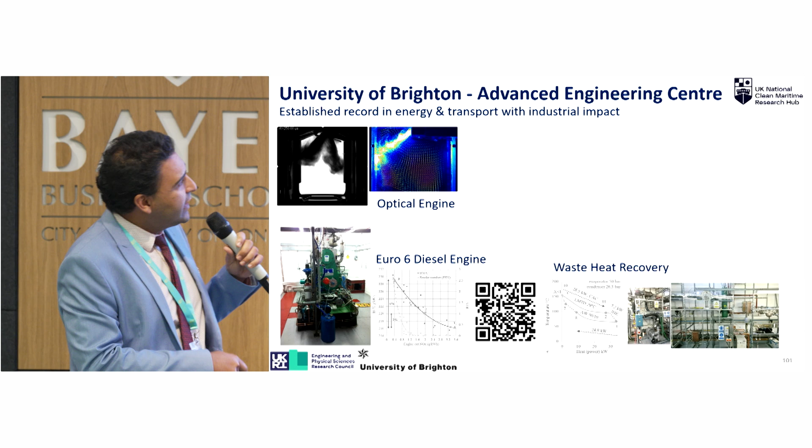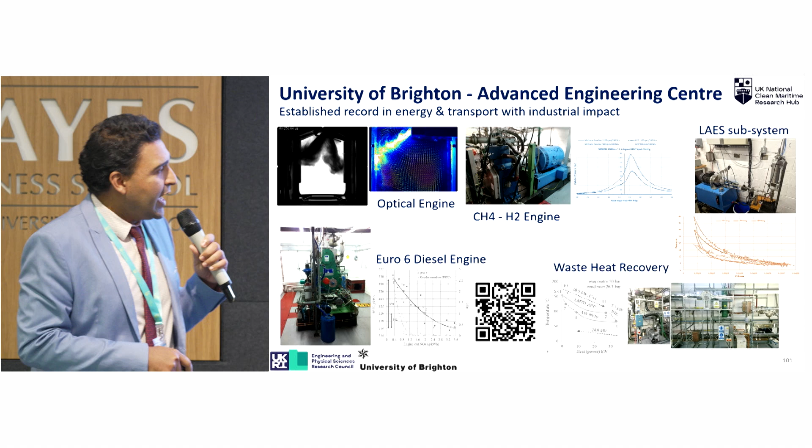If we recap 10, 15 years, what are the type of things we have actually been up to? This is looking at the fundamentals inside an engine - the optical engine, looking at diesel engine works, large-scale waste heat recovery, hydrogen, methane engines, dual fuels, single fuels, and even liquid air energy storage systems. All of this has been happening at University of Brighton for the past 15 odd years, everything backed by experimental results.

I found a phrase which is quite interesting - somebody said to me that liquid hydrogen is the champagne of energy. It's for those special occasions. It is that energy intensive to actually make it right now. There are also activities happening on getting ammonia ships on the seas by 2026.

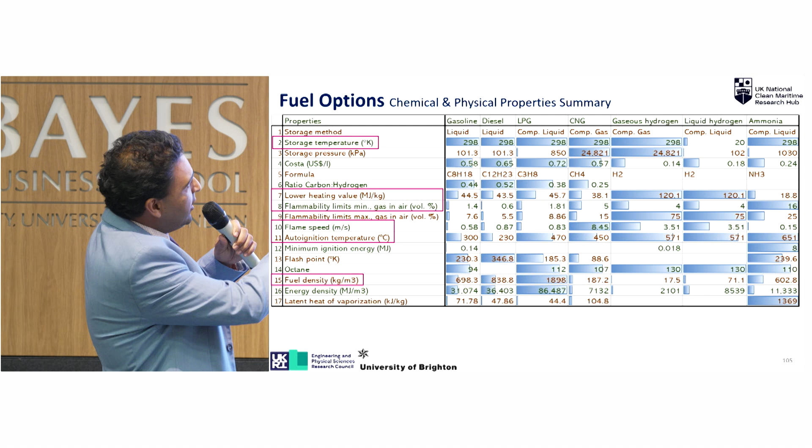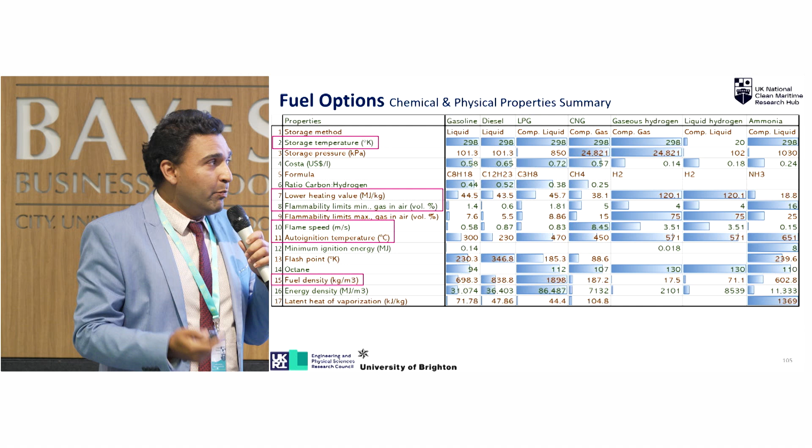There's a big debate - there's a lot of fuel options there, different criteria, different fuel metrics. This is a non-exhaustive list. Things being considered include the range of storage temperatures, how much energy you can get out of the fuel, how well the fuel burns in conventional setups, and how it's going to impact your overall shipping needs, how much cargo space reduction you're going to tolerate.

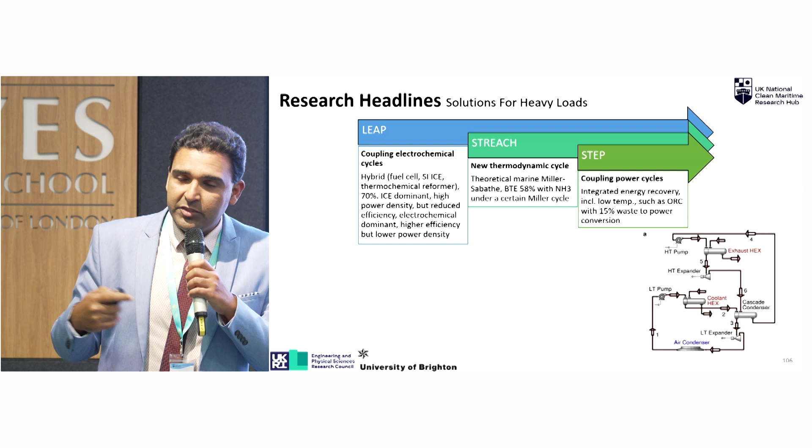If you take a deep dive into the academic literature out there, you can pretty much break everything into step, stretch, and leap approach. Step is the lower hanging fruit - heat recovery systems, new heat recovery systems coming up, tapping into some of the waste heat recovery. Stretch end is looking at new engine cycles. And leap end is pretty much all the bells and whistles - here you have a reformer, a fuel cell, an engine, everything working across different parameters.

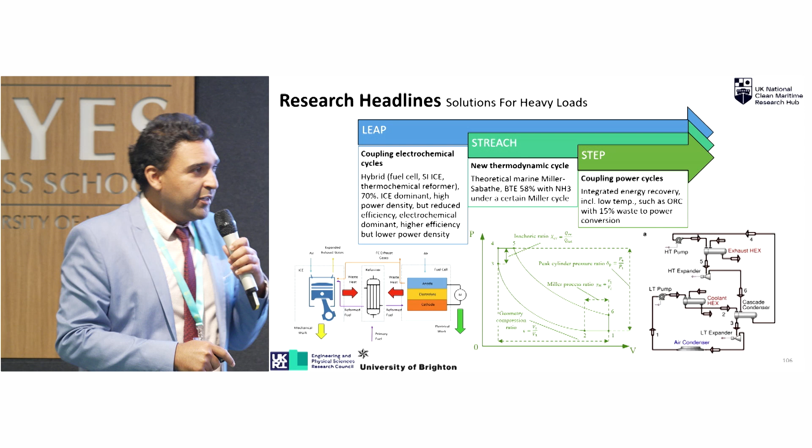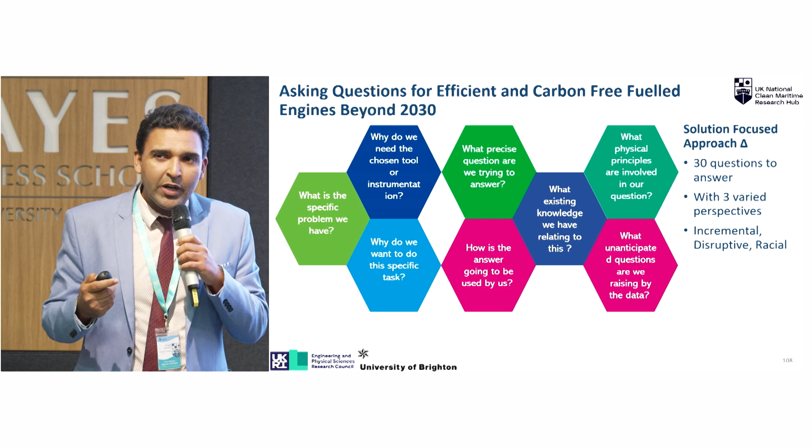So what is the methodology we use to ask ourselves how do we consider disruptive technologies? Some questions like, why do we really want to do this specific task, and what physical principles are involved? These sort of questions may seem quite mundane, but we're trying to question ourselves - are we actually unknowingly coming up with a constrained solution or not?

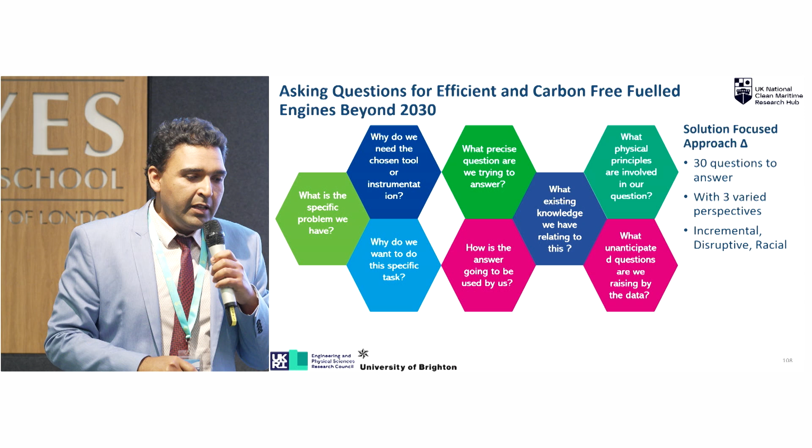So we have 30 sets of questions we look at from 3 different perspectives. From a business point of view, consider this as market and technology - you want to do incremental innovation, disruptive, and radical. Incremental - you've got to ask the right question if you want the right answer.

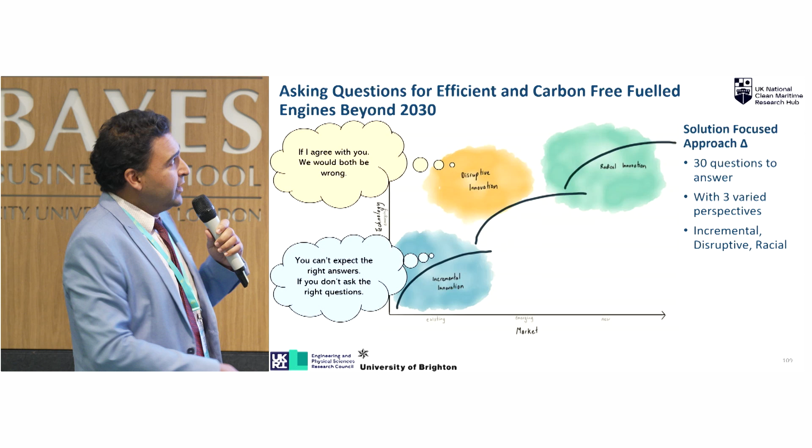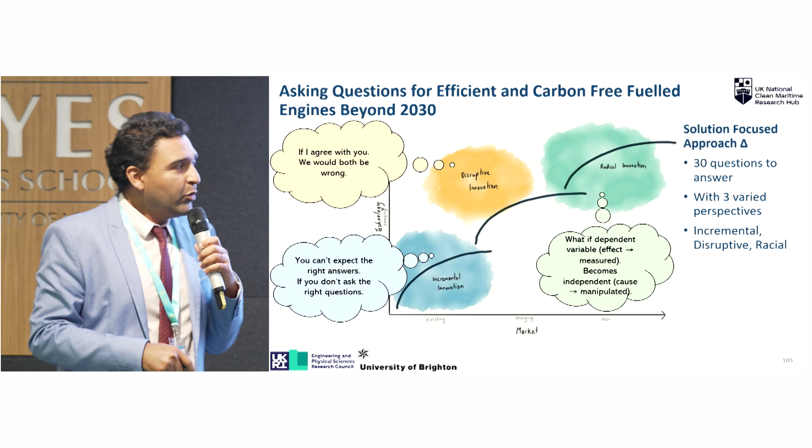Disruptive innovation - what if I think exactly the way you think, and what if we both are actually wrong? But the fun bit actually happens in radical innovations, when you say what if a constrained variable that I have, a dependent variable that I have in my system, suddenly becomes independent? That really opens new possibilities as far as new engine technologies are concerned.

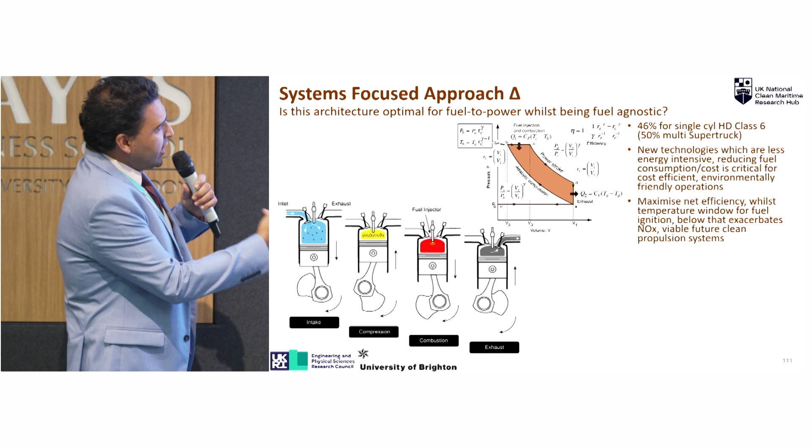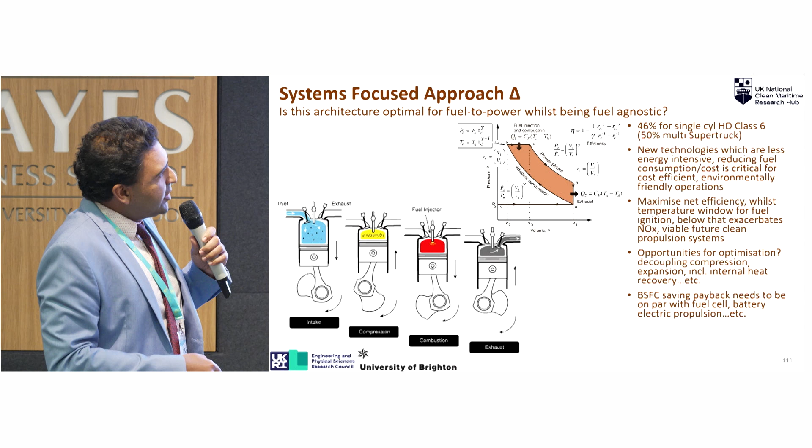We applied that methodology to a systems approach and started looking at the overall engine architecture. In a conventional four-stroke engine you're compressing, doing your combustion, then your exhaust. You want to keep it cool, heat it up, combust it, and everything is happening in that one cylinder. So we questioned ourselves: what opportunities can we gain if we were to separate these processes out and optimize each and every process?

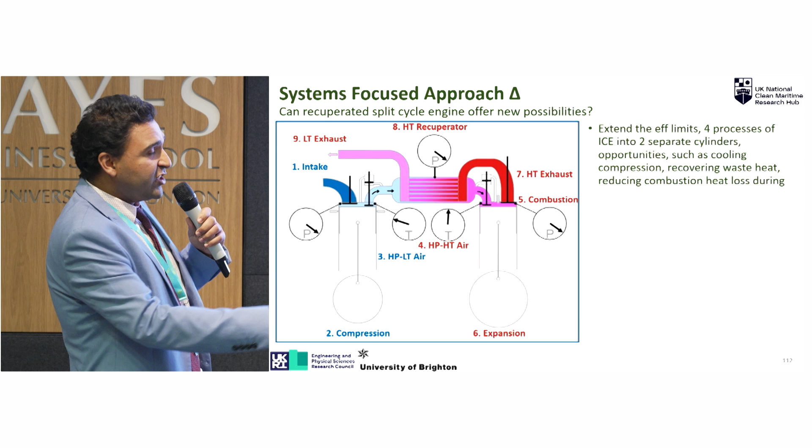Thinking about radical engine technologies, but nonetheless ones that utilize very similar engine architectures to what we have right now, this setup in front of us is called a split cycle engine. It separates the compression, expansion, and power generation into two separate parts, so you have more variables you can tune and optimize.

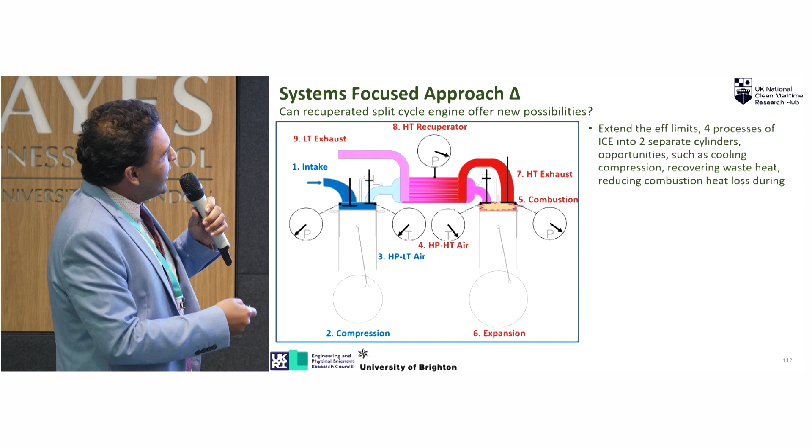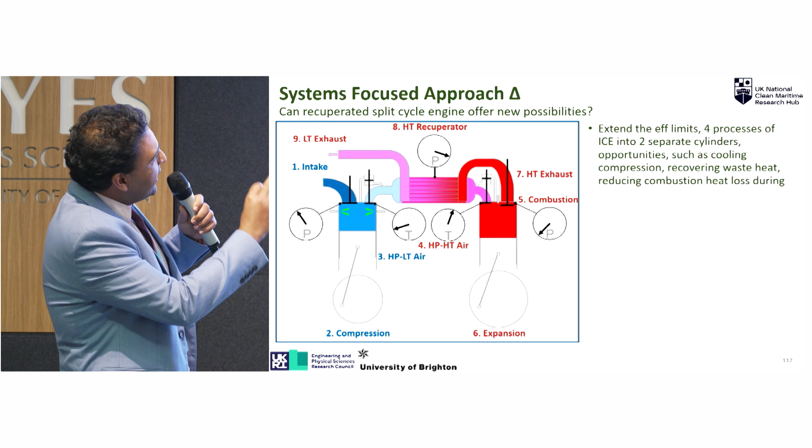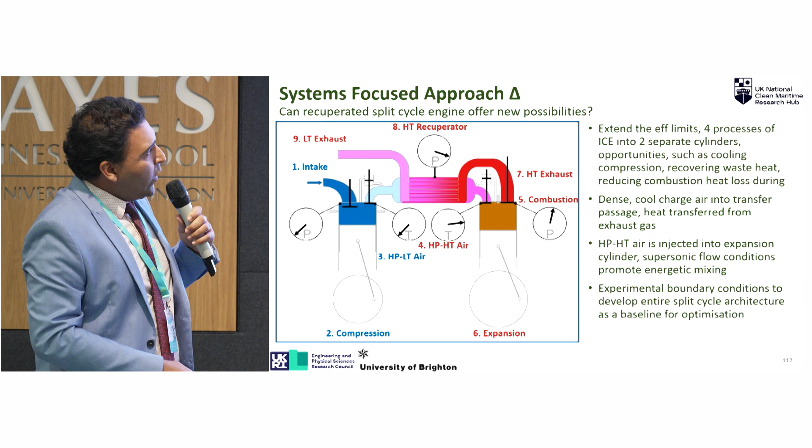We undertook lots of experimental activities trying to optimize these subsystems and connect them all up in an overall systems approach.

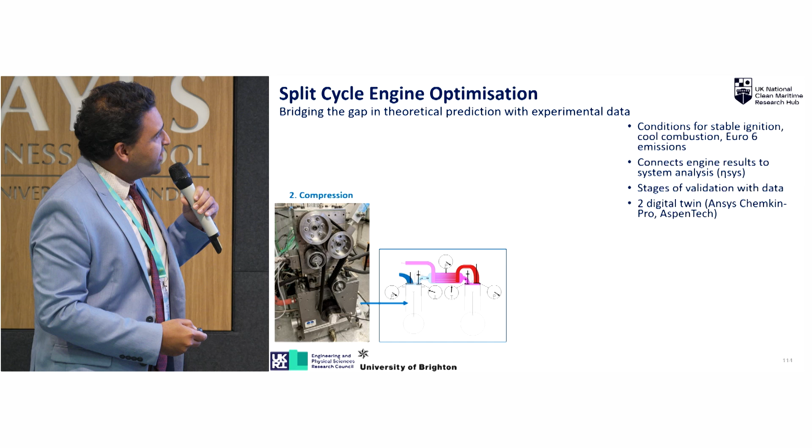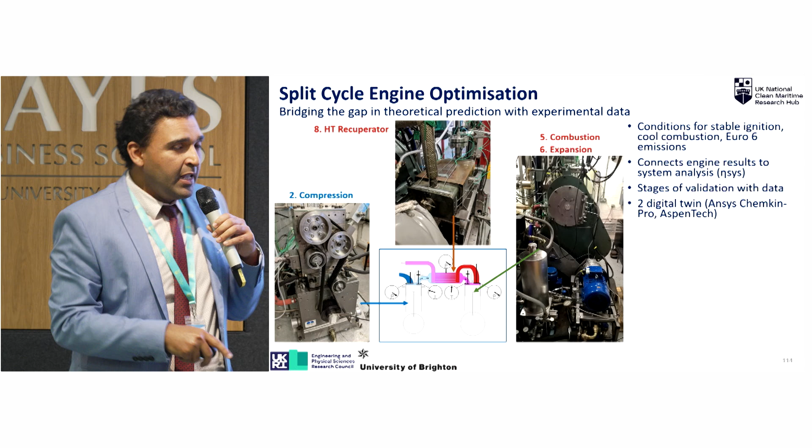At the compressor end, this is what our compressor test bed looked like. This is our compressor setup, where all the experimental activities happened. That's our expander rig, which is our power generation, and we have our internal heat recuperation. So any exhaust heat coming out of the system is actually being recovered within the system in the process.

We mapped all of these things up and created digital twins of them to do all the exploratory studies that we wanted.

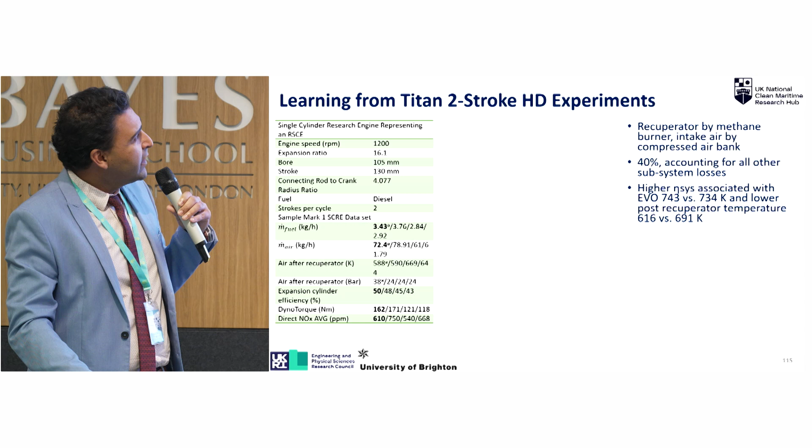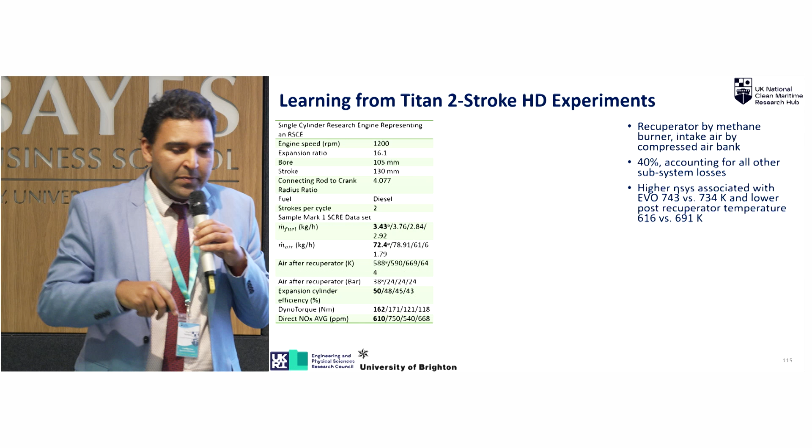This is just a parametric input-output that came out of some of our tests. The key number in bold here is we're starting with an expander efficiency of our system at 50%, but when we start including all the losses into account, this brings it back down, and we're around the 40% threshold.

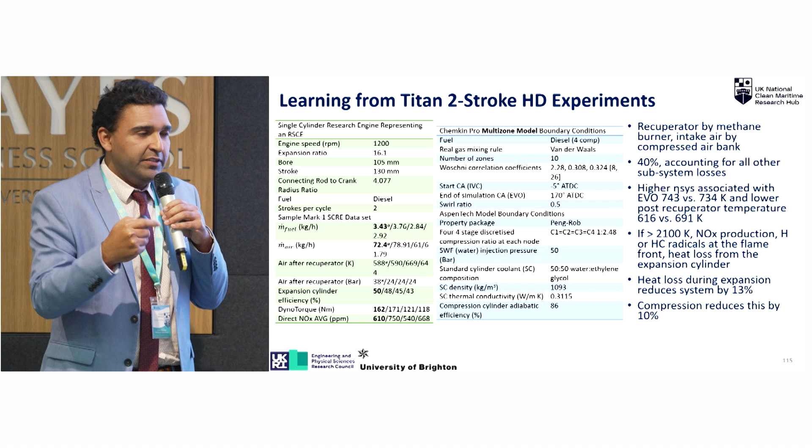Keep in mind this is a single-cylinder engine. Its efficiency is going to be slightly lower than in a multi-cylinder case. So what we really wanted to do with this overall project was push that 40% as high as we can.

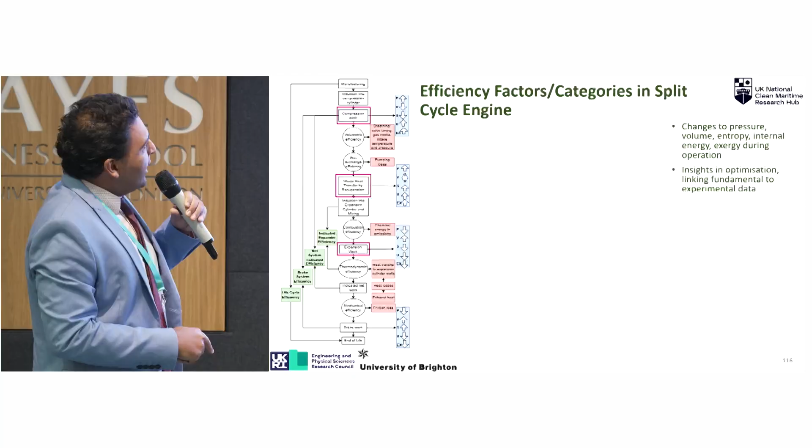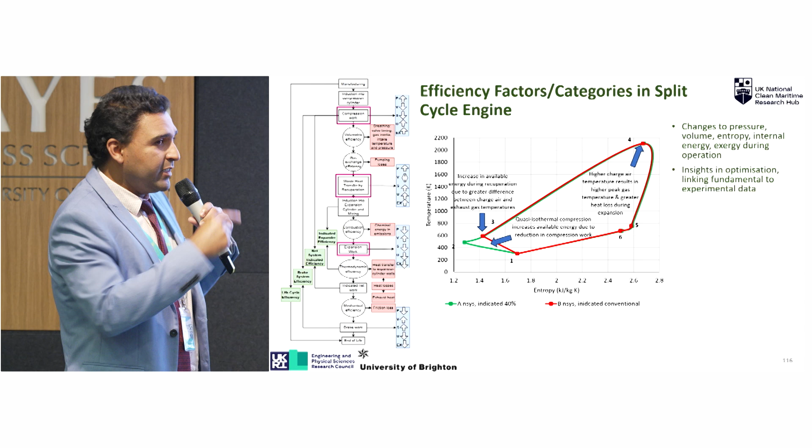I'm teasing you a little bit with what the end result should look like, but the area under the graph is linked to efficiency. The greater area we can get, the more effective fuel-to-power conversion we can have.

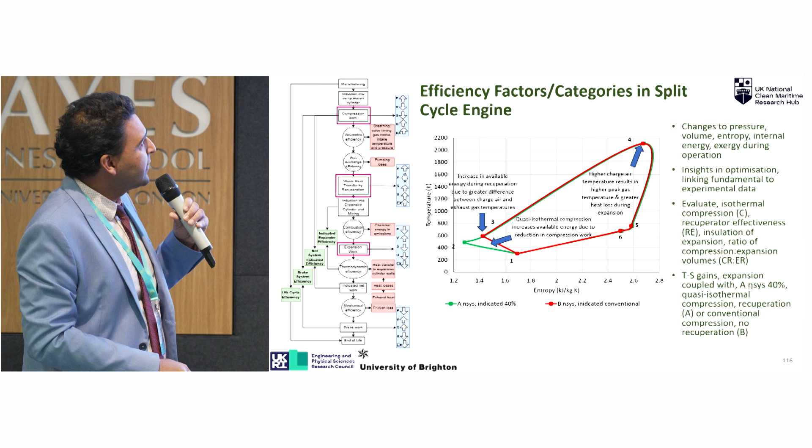We want to do all of this while being fuel agnostic as far as the engine is concerned. So compression, waste heat recuperation, and expansion work is what we're going to be focusing on.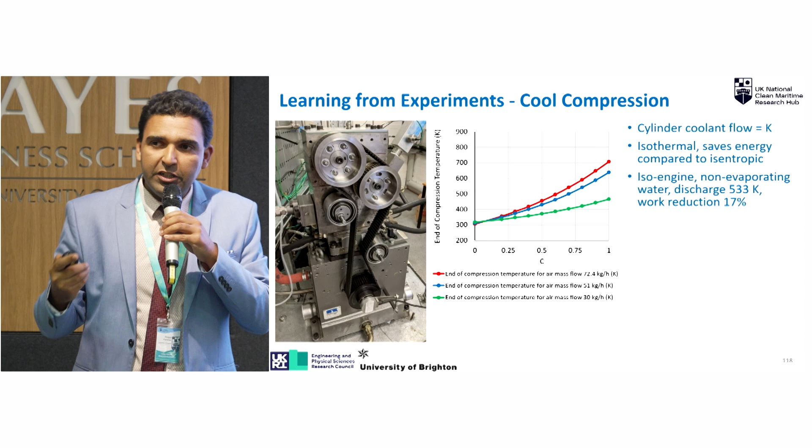Let's look at some of the compression results. These are analytical results, so we have a good appreciation of how much compression we actually need to opt for at our compressor end of the cylinder. We want to opt for isothermal compression - you can get more work savings out in the process.

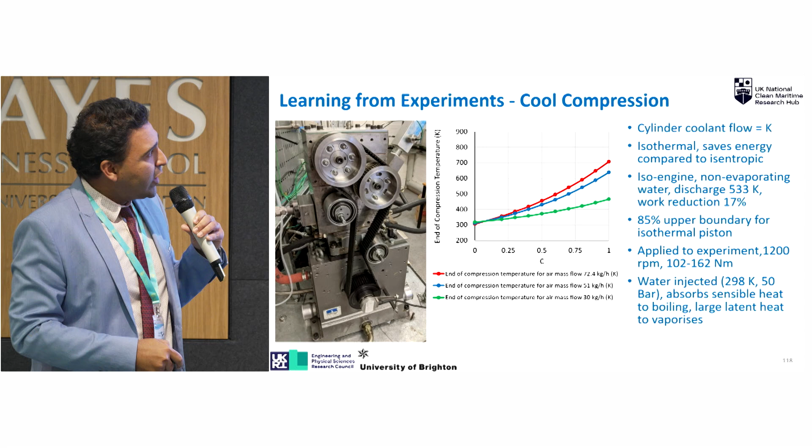That is actually telling us from a practical point of view where the trade-off needs to be made. Around that 0.5 to 0.6 compression index number, if we can maintain that, we can maintain practical systems in the process. There are other ways to optimize the cooling part too, but that's one of the routes we've gone down.

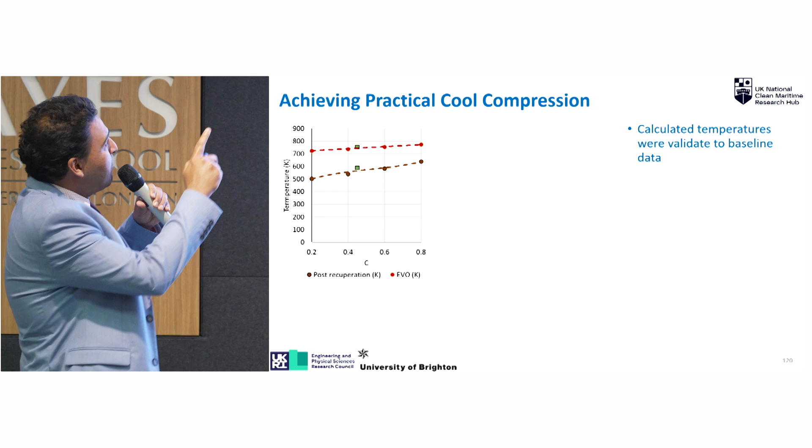The green dots you're seeing on that line are mapping the results, same as what we're getting in the digital twins that we have. Go back to that fact I mentioned, the more area under the graph we get, the more effective the system is going to be.

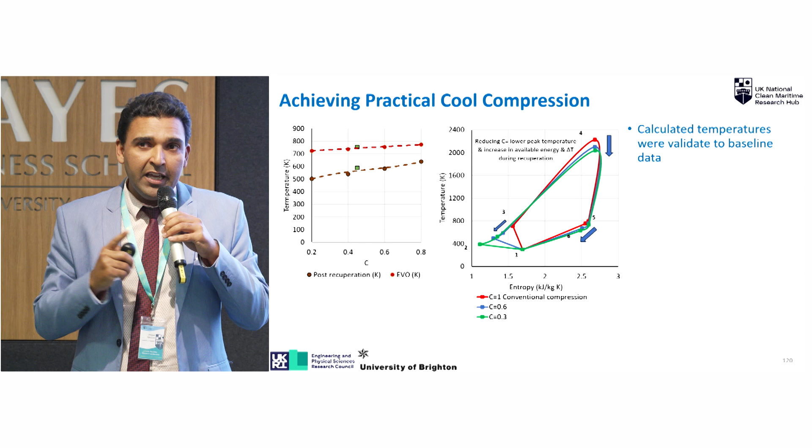Think about that red loop, which is a fully optimized diesel cycle, against the two other variants, the blue loop and the green loop, which are running in split cycle mode with cool compression and internal heat recuperation. This straight away tells us we are getting higher efficiency in the overall system.

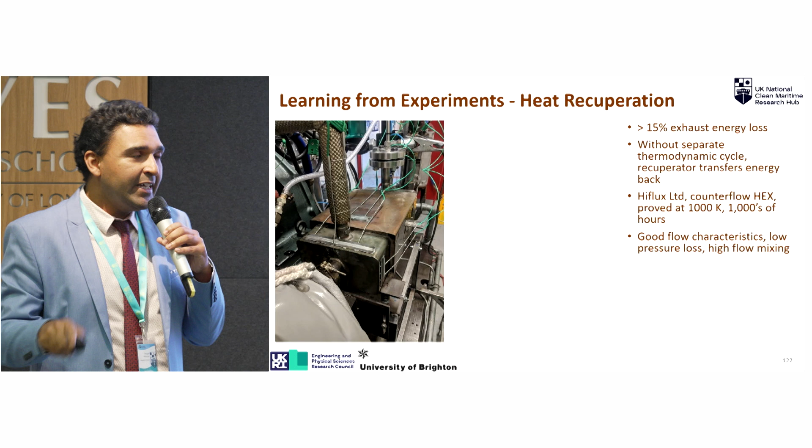So, heat recuperation. Every engine running out there loses about 15% of all the fuel's chemical energy out the exhaust tailpipe. We don't want to lose that. We want to internally recover all that heat. This is a heat recuperation setup we worked on with one of the companies, Hiflux Limited.

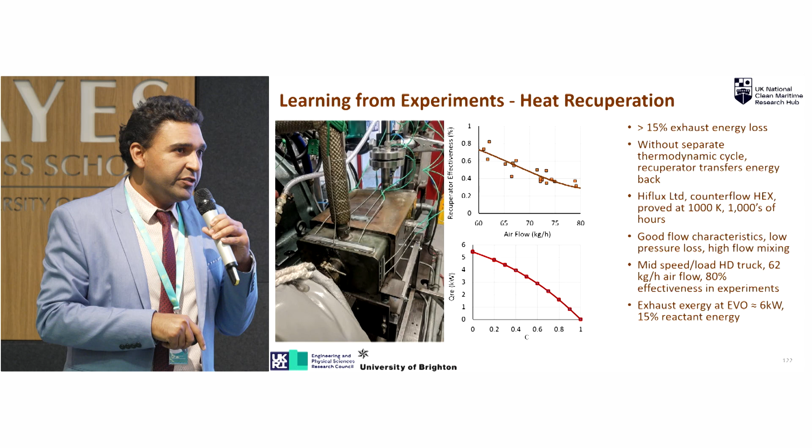The top graph shows the effectiveness of a heat exchanger there. We are getting up to almost 80% internal heat recuperation. One of the final numbers at the bottom right shows we are able to recover 15% of the fuel chemical energy back into the overall system, energy that would otherwise just go through the exhaust tailpipe.

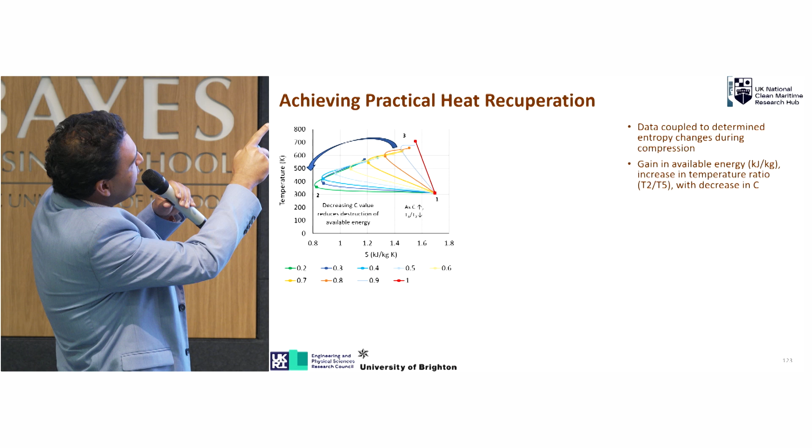That straight red line is where we started. By doing cool compression and internal recuperation, we are able to make the area bigger and bigger, and we are able to get increased efficiency in the overall process.

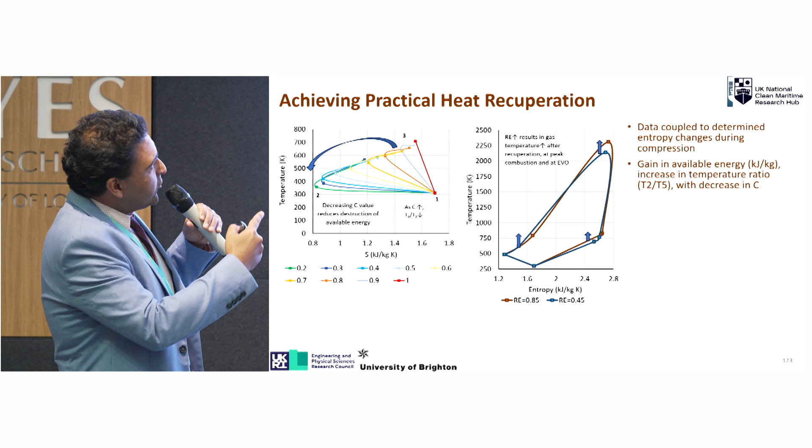The variability, the fact that we have so many variables we can tune and optimize, allows us to make this type of engine architecture agnostic to the type of fuel. The two different optimizations run here, which were also shown in the experiments, are tailored for different fuels, because some fuels want more ignition energy to burn and burn at higher temperatures, whereas others do not.

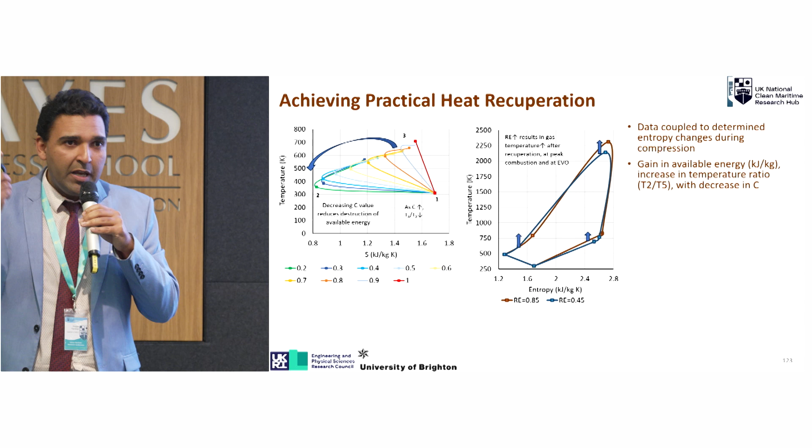So we are able to tailor the cool compression, we are able to tailor the internal heat recuperation, and as a result, we are able to tailor the demand of the top end temperature the setup actually requires.

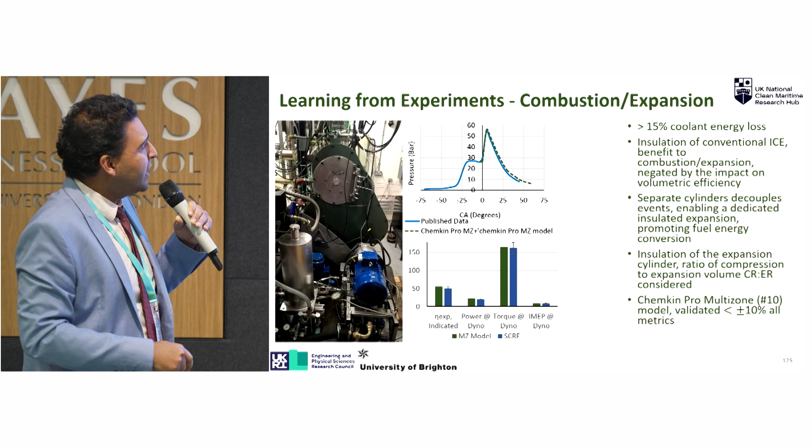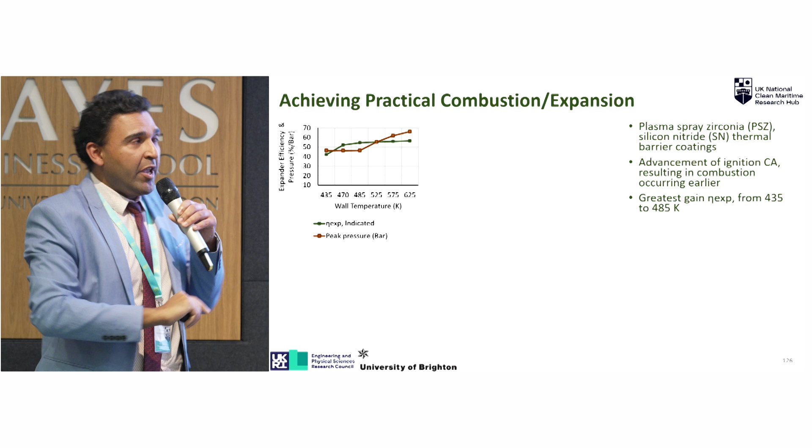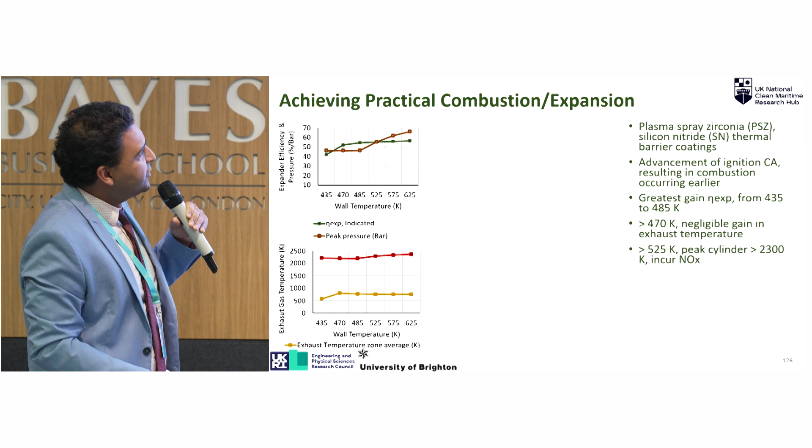The final thing I wanted to mention regarding expansion optimization is, if you look at the green line going on top, we are able to find a plateau beyond which we're not really getting any efficiency benefits. So we've found a sweet spot of optimizing the combustion cylinder without increasing any NOx in the process, because we are tracking the in-cylinder peak temperature.

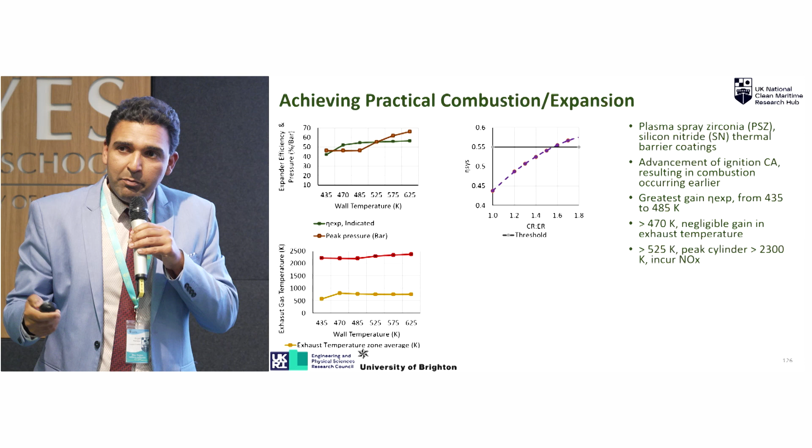This final graph is really what we were after. We started with an early 40% engine efficiency. By optimizing the cool compression, internal heat recuperation, and expansion process, we are able to exceed that 55% efficiency threshold. Keep in mind, this is a single cylinder engine, so 55% efficiency for a single cylinder engine is relatively high.

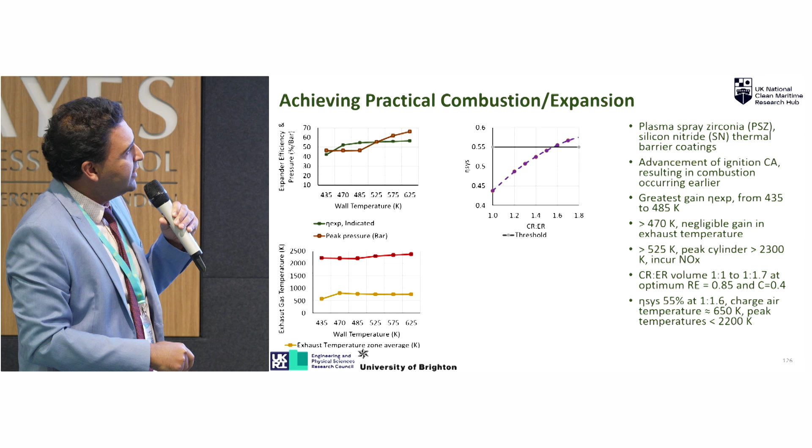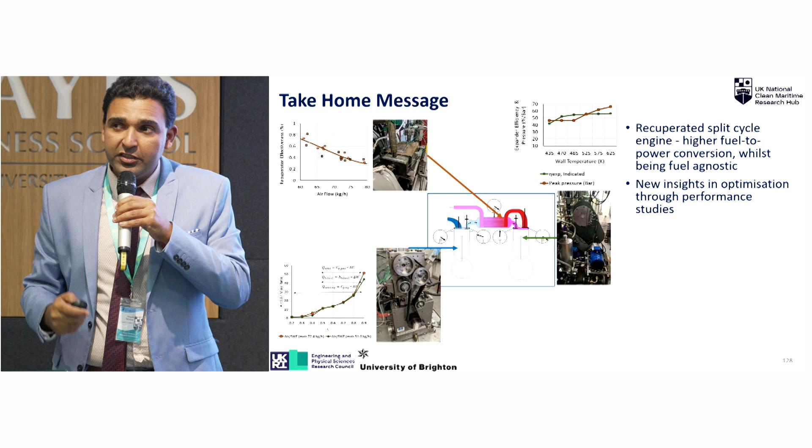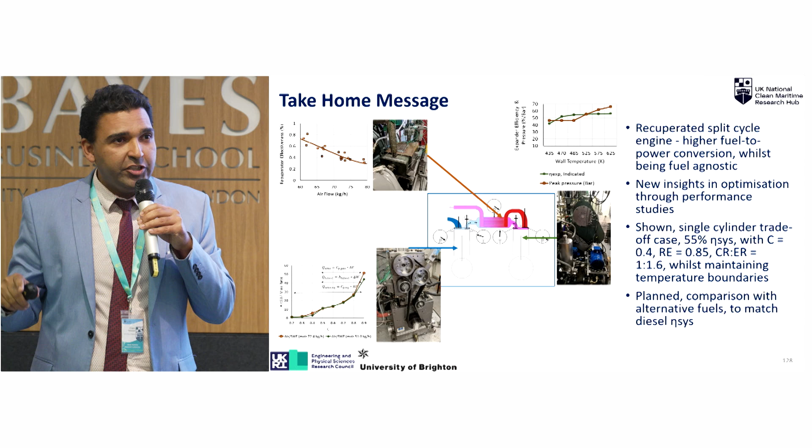Let me wrap this up with some take-home messages. I've shown you the cool compression, internal heat recuperation, and expansion results coming from a split cycle engine architecture. The main thing to take away is that we must consider disruptive engine technologies that are fuel agnostic and high efficiency, if any transition roadmap needs to be implemented alongside any end goal use of a carbon-free fuel.